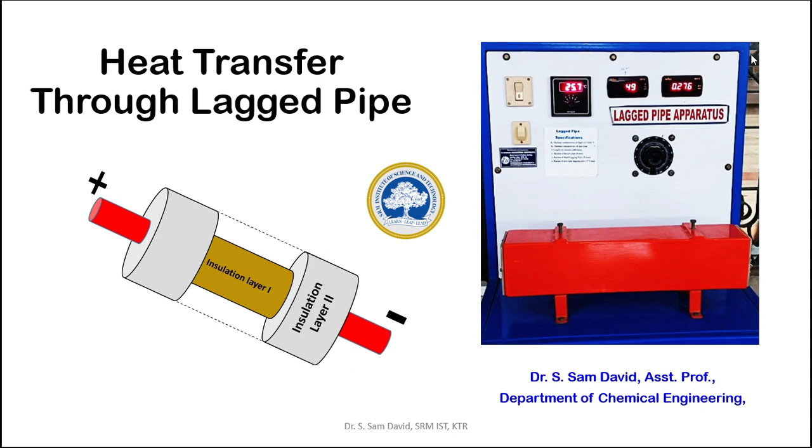In this lagged pipe apparatus, we're going to delay the rate of heat transfer from the hot body by insulating with different layers. Why do we want to delay the rate of heat transfer from an object? Let me explain with an example. Let's imagine I have a beaker of hot water. I want to maintain the hotness in the water the same for a prolonged time. So what am I supposed to do? I should stop the heat energy leaving from the hot water to the surroundings.

But as per the law of thermodynamics, energy always flows from higher temperature to lower temperature. So in this case, we cannot stop the heat transfer, but we can delay the rate of heat transfer. So hope you understand that we are going to delay the rate at which the heat is going to leave the hot coffee or hot water we have in our beaker. So what we usually do, we try to insulate the container. So we'll go for a hot box or something.

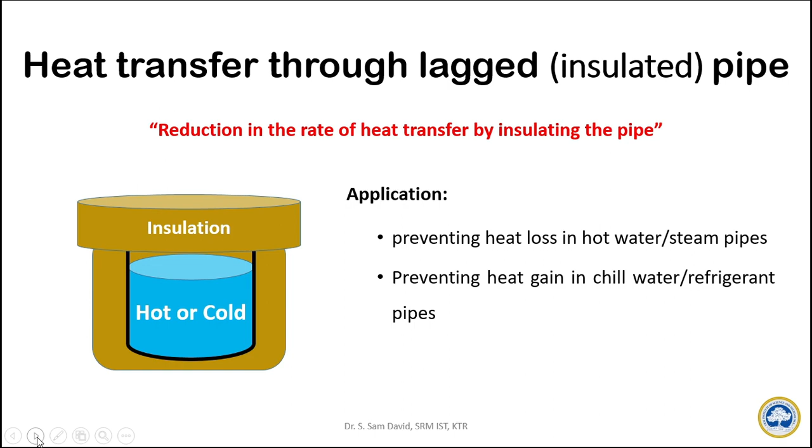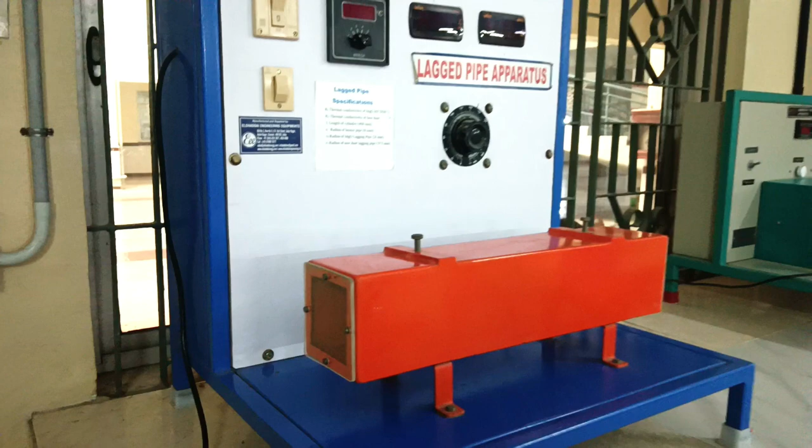Why are we insulating the system? We are insulating the system so that the rate of heat transfer from the hot object is delayed so that we can get the hotness for a prolonged time. The effect of insulation material, its thickness and the nature of the material can be understood by simple experiments. For studying that, this particular experiment, the lagged pipe apparatus, is designed.

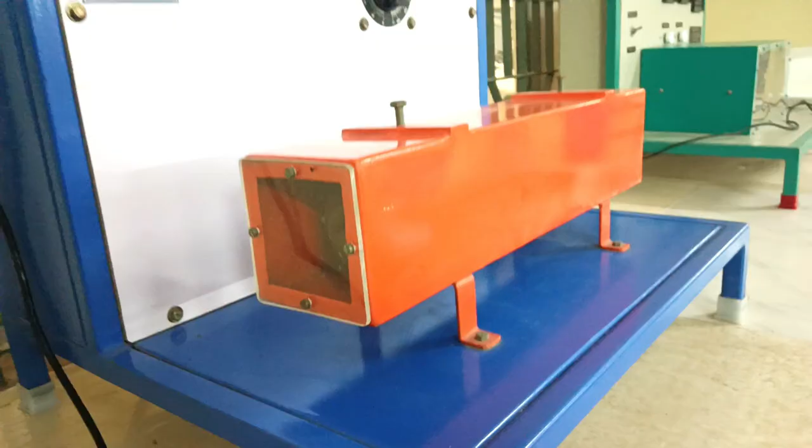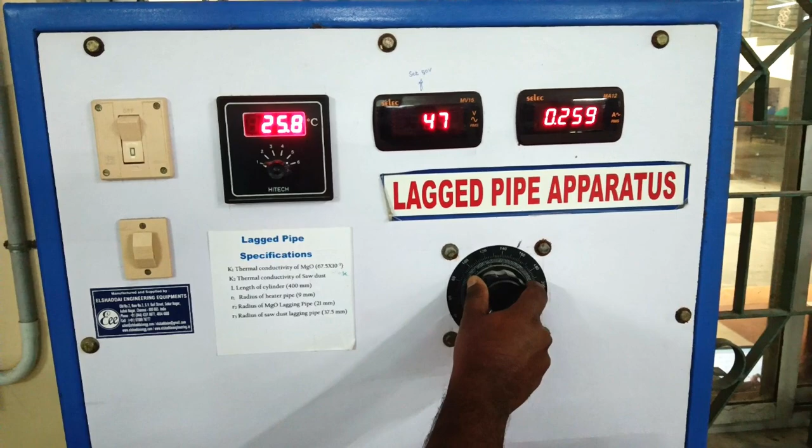In this lagged pipe experimental apparatus, a metal rod is heated by applying electrical potential across it. You can see on the right hand side of the equipment two displays. One is for displaying the voltage and the other is for displaying the current. By rotating this knob, the amount of power input given to the heater rod can be varied. You can see by rotating this, the voltage and current vary accordingly.

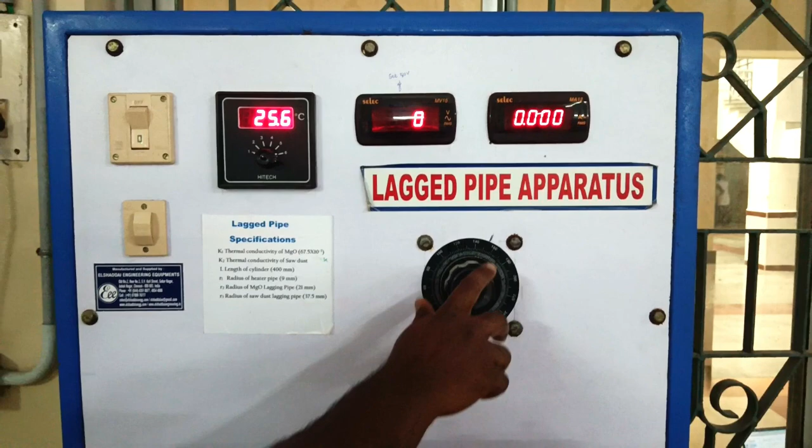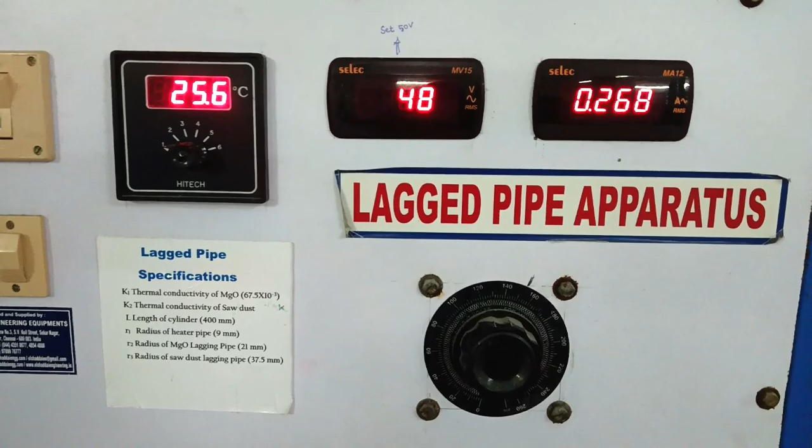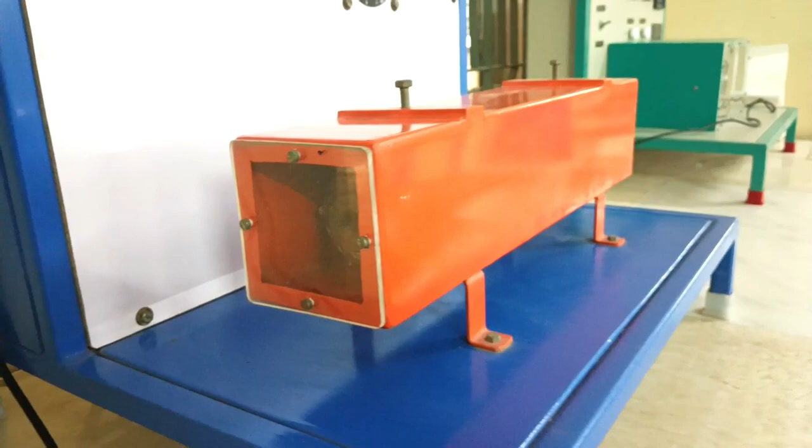Once we set the required power input, the system will start slowly getting heated. We will explore each and every part of this equipment while we do the experiment. When we apply the electrical potential, the heater rod slowly gets heated. By giving a constant potential across the electrical rod, the heat generated inside the rod can be maintained constant. Once the heater rod temperature increases, this hot object starts dissipating heat energy.

To reduce the rate of heat transfer from the metal rod, two layers of insulation are provided in this experimental apparatus. The first layer is made up of magnesium oxide and the second layer is made up of sawdust. The heat from the metal rod travels across the insulation layer and comes out at the heat transfer rate denoted QL1. The heat transfer rate for layer 2 is QL2.

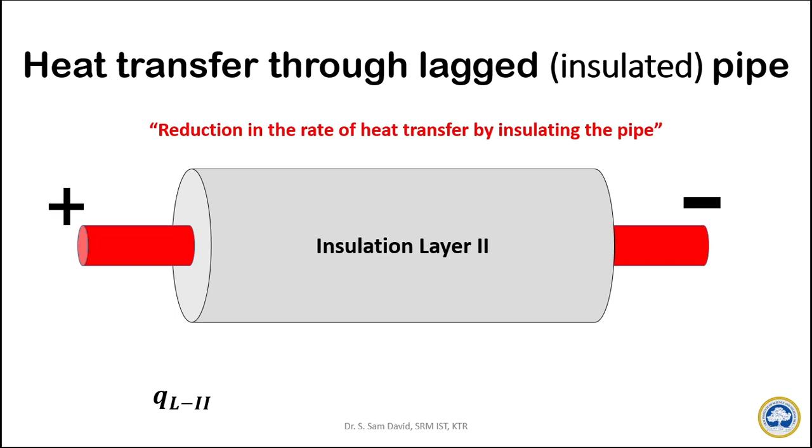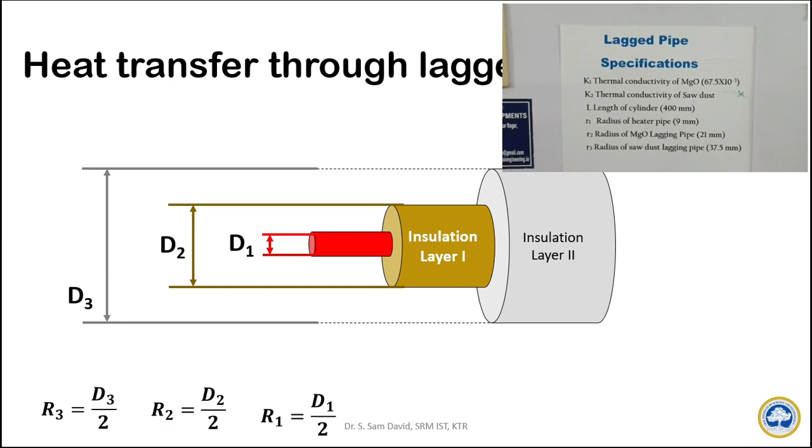This whole assembly is kept inside this orange chamber. The diameters of the metal rod, insulation layer 1 and layer 2 are given in this sticker pasted on the equipment. Once the system attains a steady state, the temperature will be almost constant across each layer. So each layer is named accordingly by THR, TL1 and TL2.

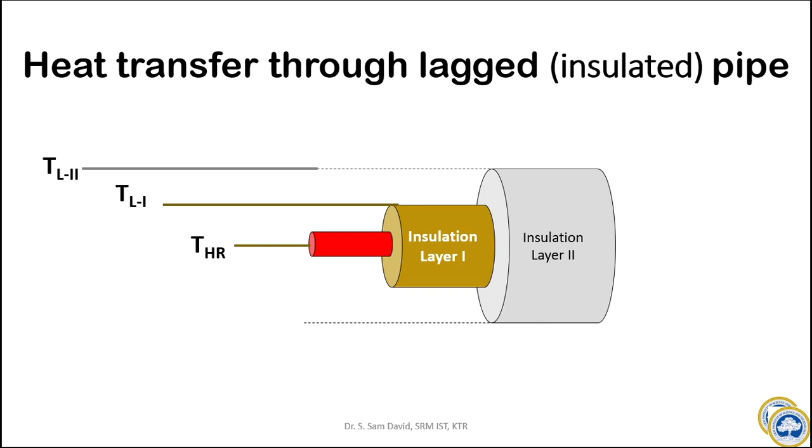In this equipment, to find the temperature of the metal rod and the insulation layers, two thermocouples are provided for each layer. In a typical experiment, after providing the voltage, the heater rod will start getting heated. To identify whether the system attains steady state or not, we have to follow the thermocouple temperatures. For that, a table is drawn with the time and each thermocouple reading.

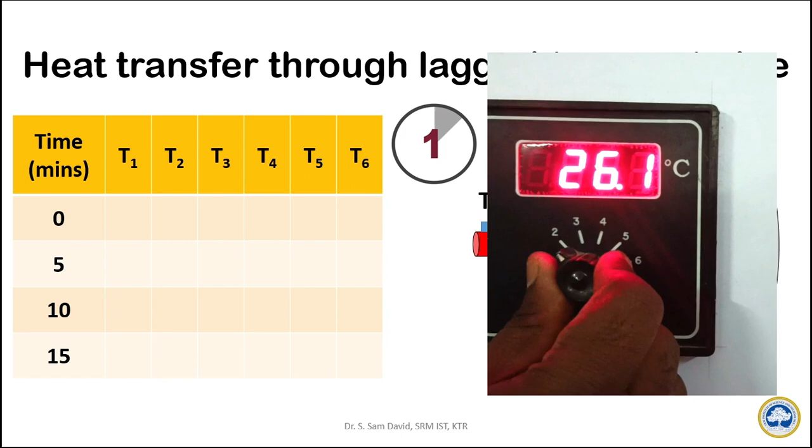T1 and T2 stand for metal rod temperature, T3 and T4 for insulation layer 1, and accordingly T5 and T6 for insulation layer 2. The thermocouple readings can be read from this particular display by adjusting this knob. When you turn the knob and provide the corresponding number, you can see the corresponding thermocouple temperature in this particular

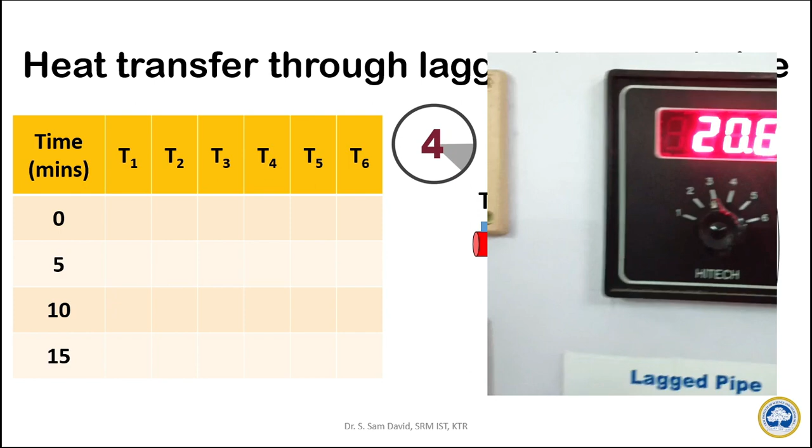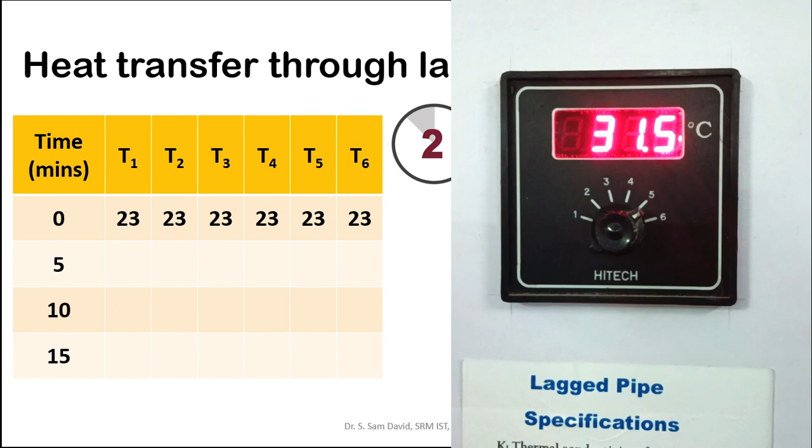digital display. After giving the power input, the time t equal to 0 reading is to be taken for all the 6 thermocouples. So once, by turning this knob, the thermocouple readings are taken down, we have to wait for the next 5 minutes for the next set of readings to identify whether the system has attained steady state or not.

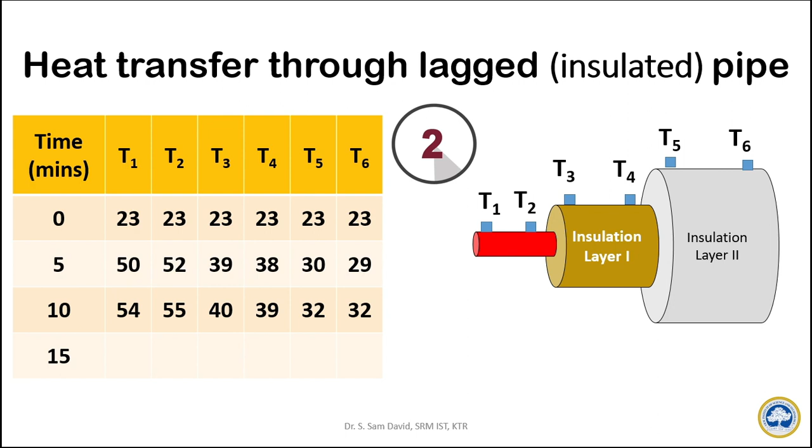From the 5th minute reading, we can see that the difference between the thermocouple readings in the 0th minute and 5th minute is very high. So the system is still getting heated up. In the 10th minute reading, we can see that the difference between the 5th minute reading and the 10th minute reading is minimal. Still, we have to take another set of readings to identify whether the system has attained steady state or not. Now we can understand that the temperature difference between the 10th minute reading and 15th minute reading is almost nil. Now we can confirm that the system attained steady state in this experiment.

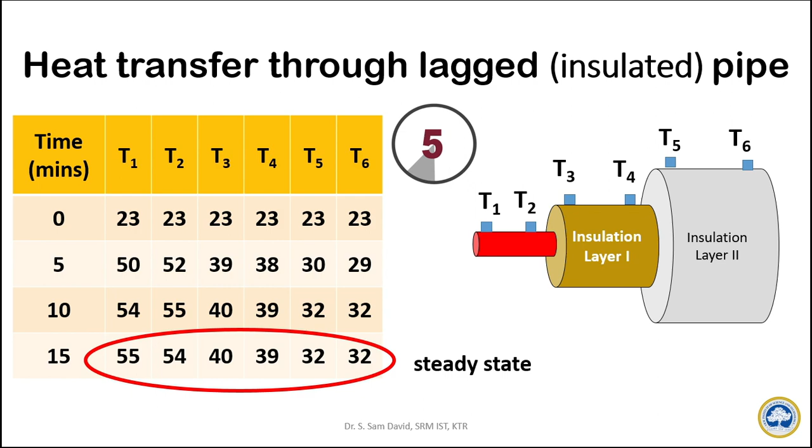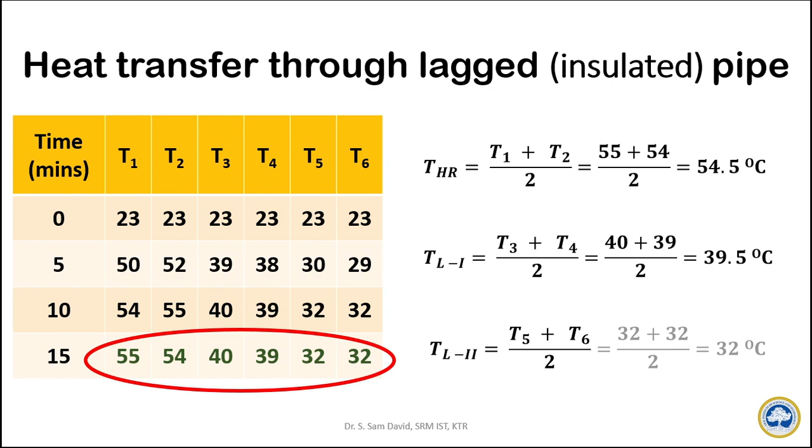As we saw in the previous slides, T1 and T2 stand for the temperature of the metal rod, T3 and T4 for layer 1, and T5 and T6 for layer 2. Now we have to average these temperatures to find the average temperature of each layer. So now we can see that the heater rod temperature is 54.5 degrees Celsius. Like that, we got the temperature for the other layers also.

Now we got the voltage input and the current input from the digital board, we got the steady state temperature for each layer, and the specification of the metal rod, that is size and length, is given in the data. Now using this, we can go with our procedure. The heat generated in the rod can be identified using the formula Q equals V into I. That is, voltage and current can be multiplied to get the power input, that is the heat Q.

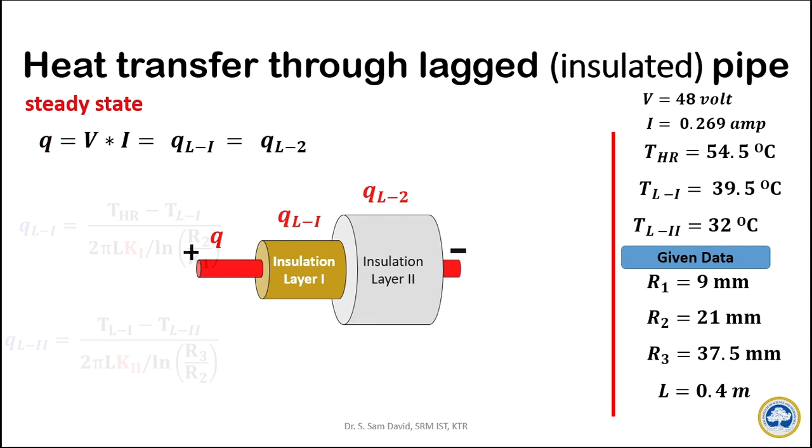At steady state, the heat transfer across each layer is the same. Hence, we can equate all the heat transfer equations. When we calculate the Q value, that will be the same for QL1 as well as QL2. As per Fourier's law of heat conduction, the heat transfer rate across a cylindrical object can be given by this formula. It has been written for layer 1 and layer 2. As per the objective of this experiment, we have to calculate the thermal conductivity of layer 1 and layer 2, that is K1 and K2.

So we have to rearrange this equation in such a way that we are able to calculate K1. Now let's look at equation 1, that is for K1. We already calculated the heater rod temperature and layer 1 temperature, and in the denominator, the length of the pipe we already have here. Then the Q we have to calculate. Then radius R1, R2 we already have here. We have the length and the radius of the metal rod.

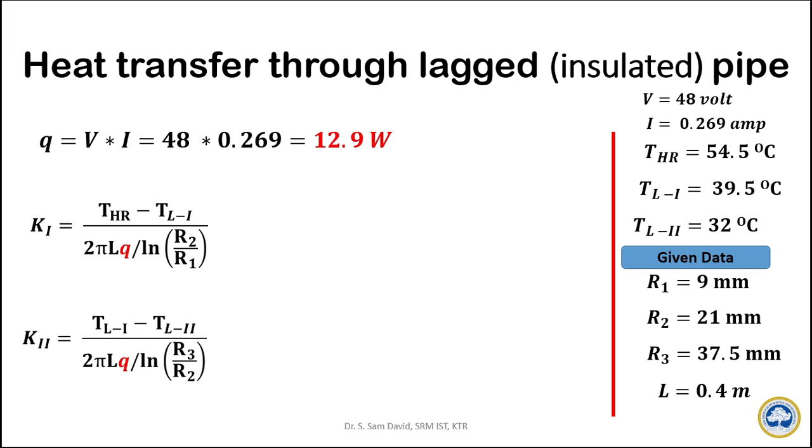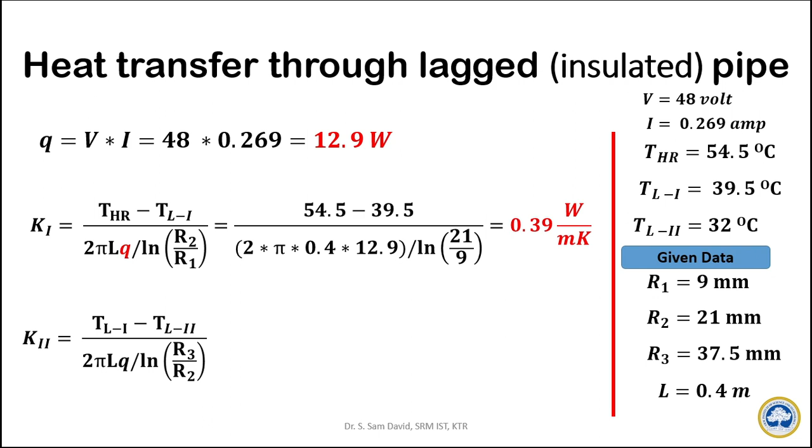Q can be calculated by multiplying voltage and current. So the voltage is 48 and the current is 0.269 amps. Multiplying both, we will get the value for the heat input. On substituting the available data in the equations, we will be able to calculate the thermal conductivity of layer 1 and the thermal conductivity of layer 2. And that's how we find the conductivity of each layer in the lagged pipe apparatus.